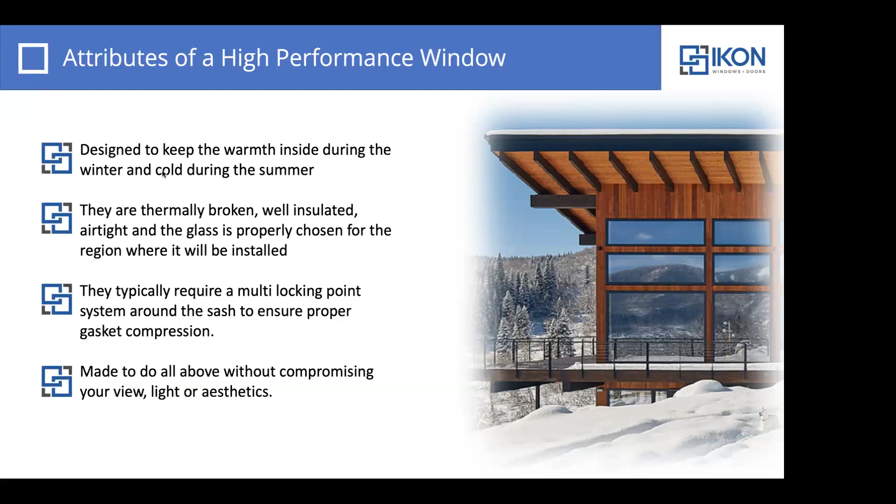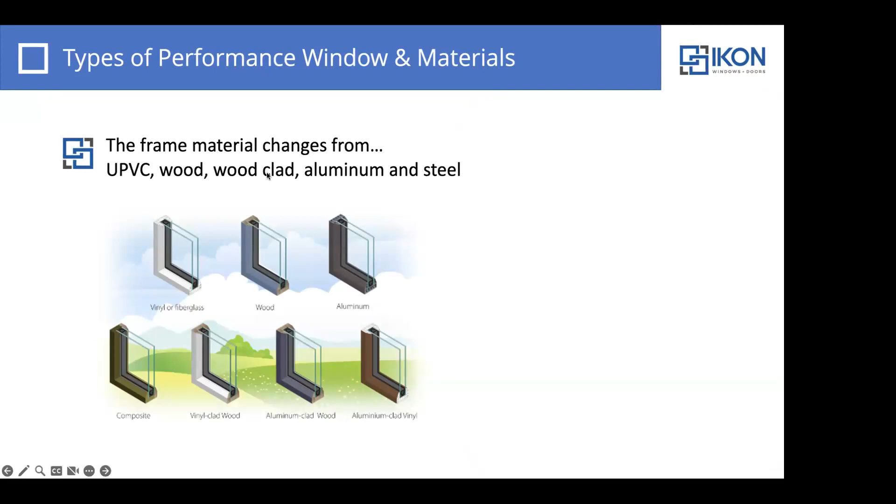So high performance windows do come in various materials. This would be your standard vinyl, fiberglass, wood, aluminum, composite, vinyl cladding, aluminum clad, and aluminum clad vinyl. Today we're going to be talking mainly about UPVC, wood clad aluminum, as well as steel. All of these have different attributes.

UPVC windows are typically our low maintenance building material. They're the best bang for your buck and will achieve pretty much the highest performance to price ratio. Aluminum is more aesthetic. It is an anti-corrosion resistant material that can also achieve very high performance values with the correct thermal breaks.

Wood is sustainable, renewable, and in general, it's a higher performance material in itself, just because of the way that wood is naturally insulative. And steel, of course, is mainly an aesthetic option, typically made from galvanized steel as well as stainless steel. Thermal breaks are used in steel windows to increase the thermal performance.

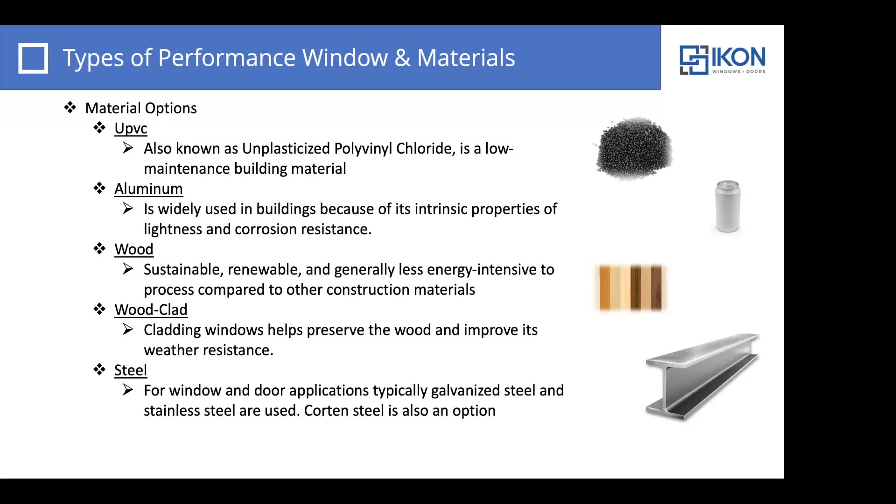So with UPVC windows, if we're looking for high performance UPVC windows of any kind, what we're going to be looking for is a multi-chamber design. So the increased number of chambers will increase the performance of a window. If you look to the left side, our IKON Optima Plus window, you'll see the number of chambers compared to, let's say, a typical Marvin window. So the increase in chambers will increase the performance of the window.

They can also be filled with different thermal solutions, such as foam or aerogel inserts, to further increase the performance of that frame. So with most windows, the frame is usually the weakest part. So as long as we can increase the performance of that frame, we'll be increasing the performance of the overall window.

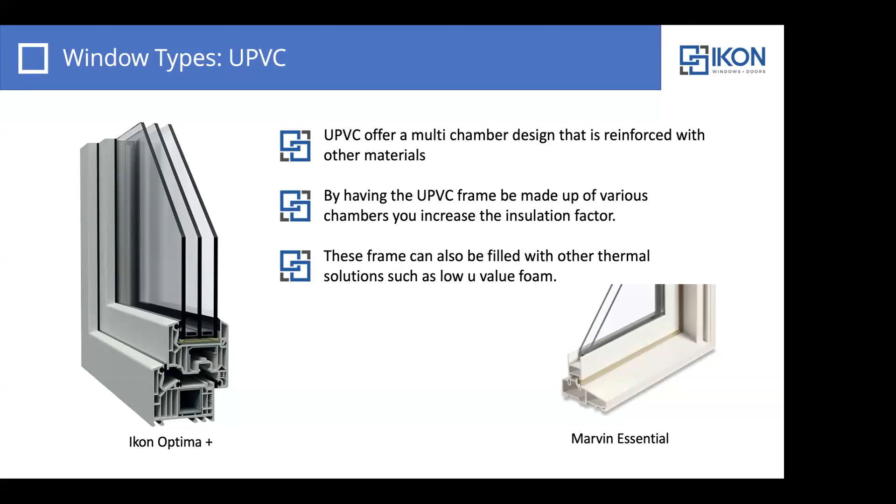Aluminum windows have a polyamide thermal break between the interior and exterior extrusions. This is usually made from a non-conductive piece, and the wider the thermal break, the higher performing the window will be. It also takes a note from our UPVC windows because they can also be made with various chambers that will also increase the performance of the window.

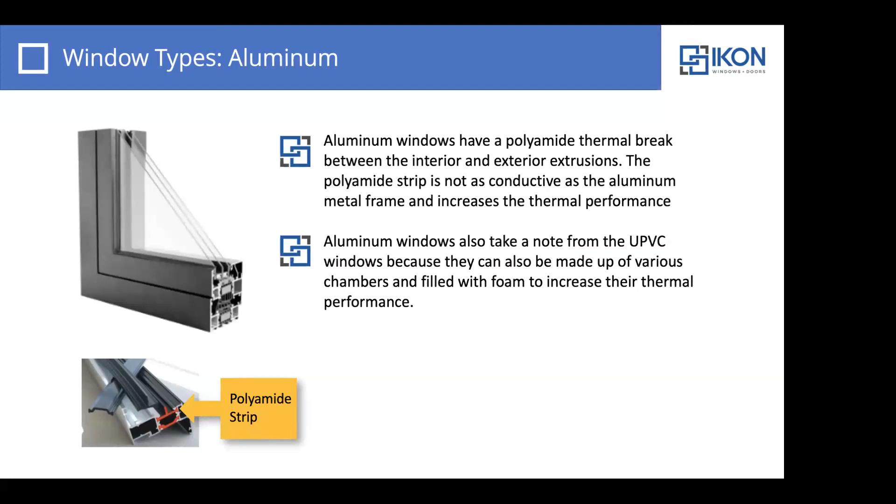So when looking at aluminum windows, what we're going to want to look at is the length of the thermal break that joins the interior and exterior, and of course any type of additional chambers in the thermal break or the aluminum extrusion will also increase the thermal performance of that frame.

Now, wood is naturally a good material for thermal insulation. We don't really need to do much in increasing the performance of wooden windows. If you're looking for the lowest possible U value, you're going to be looking at the width of the window frame. So typically the wider or deeper the wood is, the lower the U value will be. On cladded units, you can also look at insulated foam inserted between the cladded material and the wooden material to increase the thermal performance.

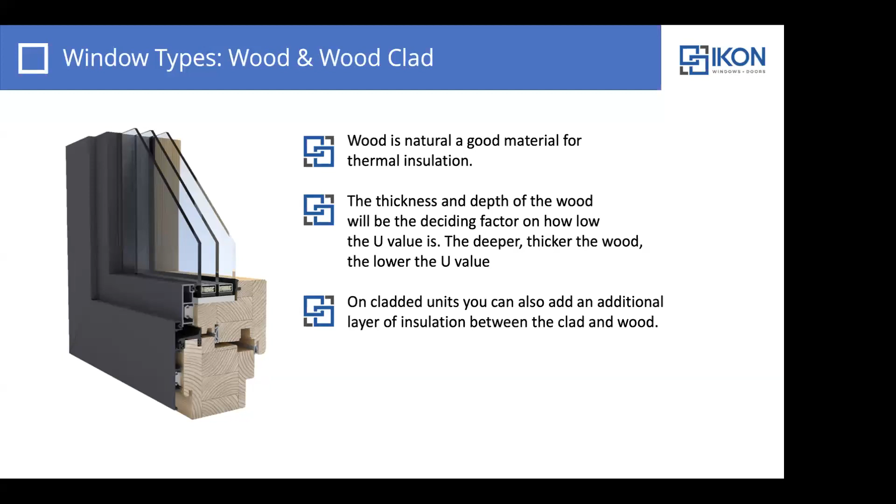Now, steel is mainly an aesthetic choice. So if we're looking for passive house U values, we're probably not going to achieve that with steel, but we can still get below Energy Star. We can still see U values in the 0.2 range, but this will solely depend on the type of thermal breaks that we use in steel. So the same concept applies as the aluminum windows. The wider the thermal break, the higher performing the frame will be.

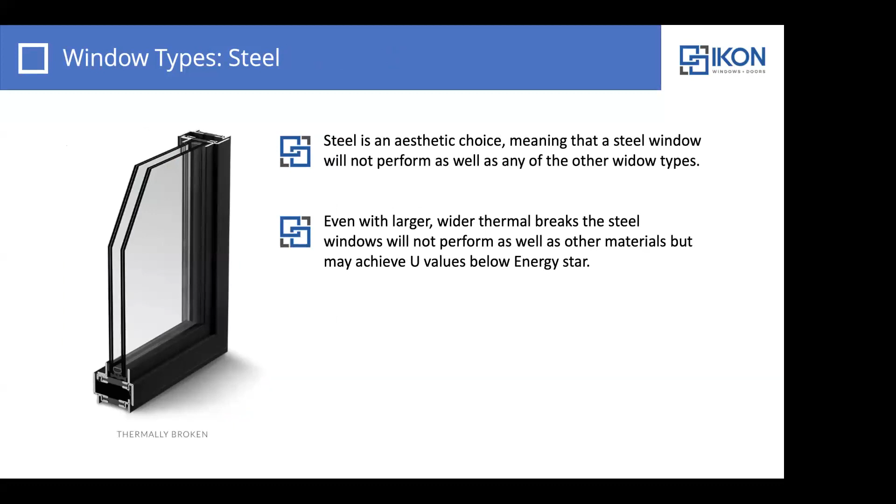So a little bit more about thermal breaks. Thermal breaks refer to the design feature that helps reduce the transfer of heat between the interior and exterior of a building through the window frames. So depending on the frame you choose, you will need to think about the best type of thermal break for your climate zone. If we're in a colder climate, we want to see those thermal breaks much wider, versus if you're in a warmer climate, you may not need to go crazy and your thermal break may not have to be as wide.

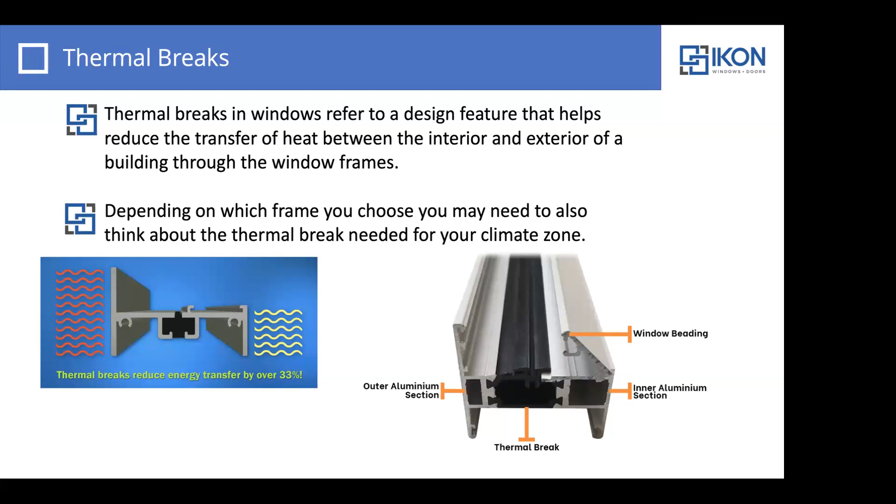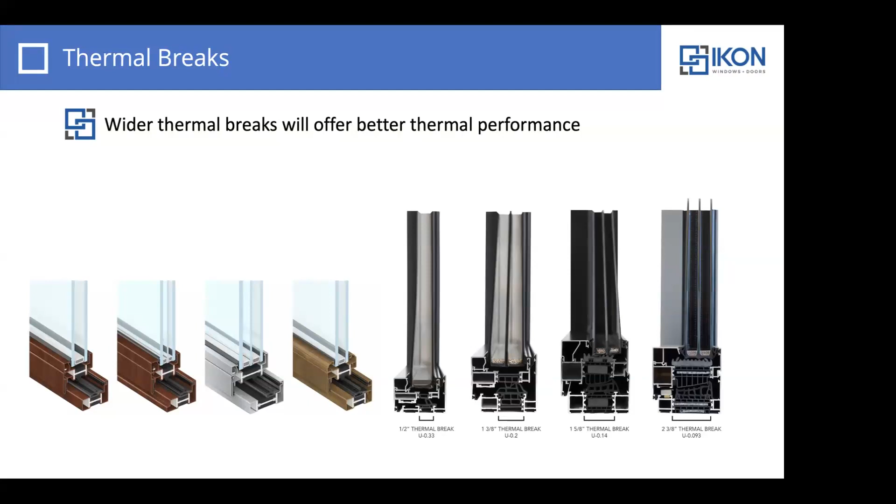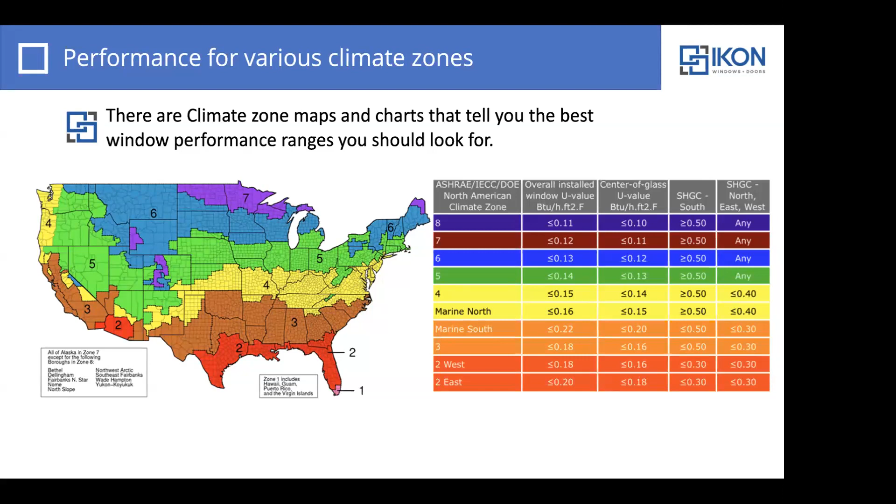Another key feature of high performance windows is a well insulated glass unit. So insulated glass units are typically double, triple, or quad pane glass units that we put inside the windows and the doors, of course. And typically there's a gas. What we look for is at least an argon gas to be filled in between each chamber. Argon is the most common and improves the U value because it does not conduct heat as well as air. We can also use krypton if needed. However, krypton is a little bit more expensive, but it does insulate better than argon.

What we've seen, it's sometimes better to go with a triple pane window and argon gas than, let's say, go with a double pane window and krypton. You'll get a better price for the triple pane, and the gas, well, in my opinion, the krypton gas is sometimes not worth the extra cost for the performance gain that you will have.

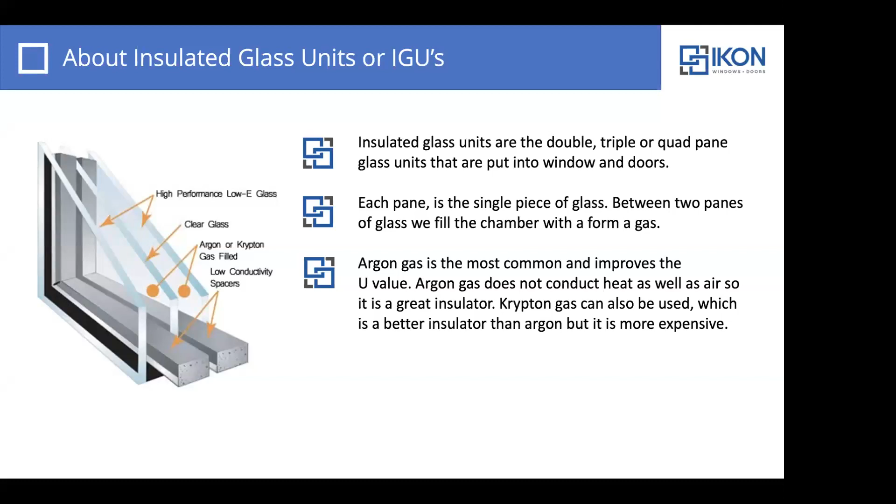Around the IGU, there's a spacer bar. High performance windows, high performance IGUs will use a warm spacer versus a traditional spacer. Traditional spacers are typically made out of aluminum or steel and they're empty, whereas a warm spacer will be made of some type of composite plastic and usually filled with desiccant. So what this spacer bar does, it further reduces the heat transfer at the bond edge, which translates into energy savings and warmth of the overall window.

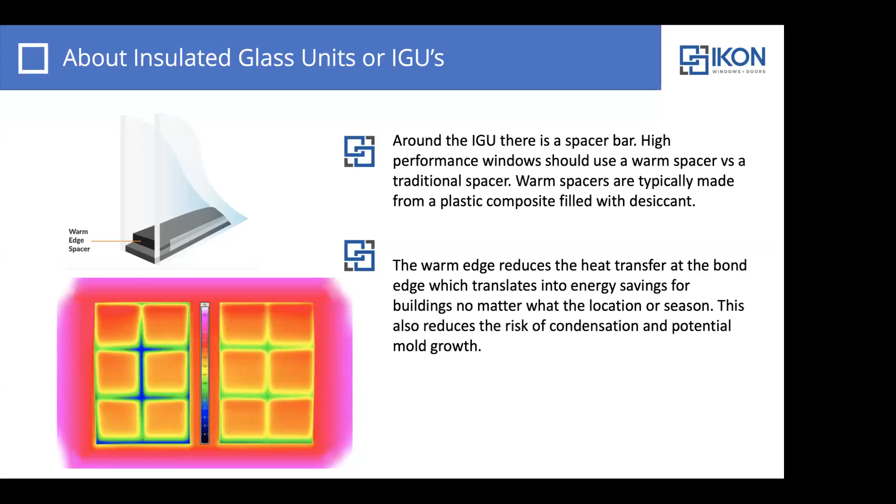If you look at the bottom left, you'll see one window with the blue crosses in the middle. That's what you would see with a cold spacer or a steel spacer, versus to your right where you do see a warmer spacer. You don't have as much heat going through that portion of the glass. With aluminum and steel spacers, due to the metal's high conductivity, heat can escape to the outside more easily. So this just shows you what we'd be looking at with a traditional spacer versus a warm spacer. The warm spacers, thanks to the high performance, minimize the cold bridge between the inside and the outside.

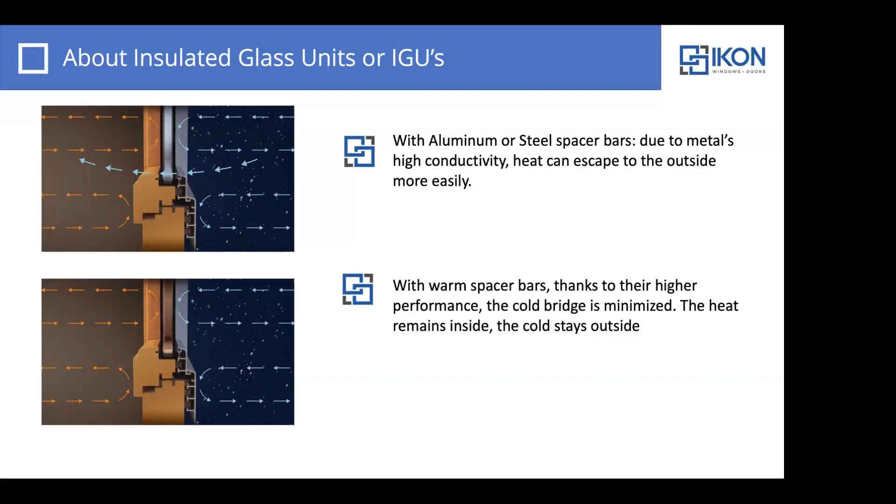So going back a little bit, I've already mentioned U value and SHGC just a little bit in the previous slides. But to determine how well our windows perform, we will be looking at the U value, the SHGC, and the air tightness. So the U value is the heat flow of the window, how much heat is actually escaping. It's the reciprocal of the R value. So typically, the lower the U value, the higher the window will perform. And in reverse, the higher the R value, the better the window will perform.

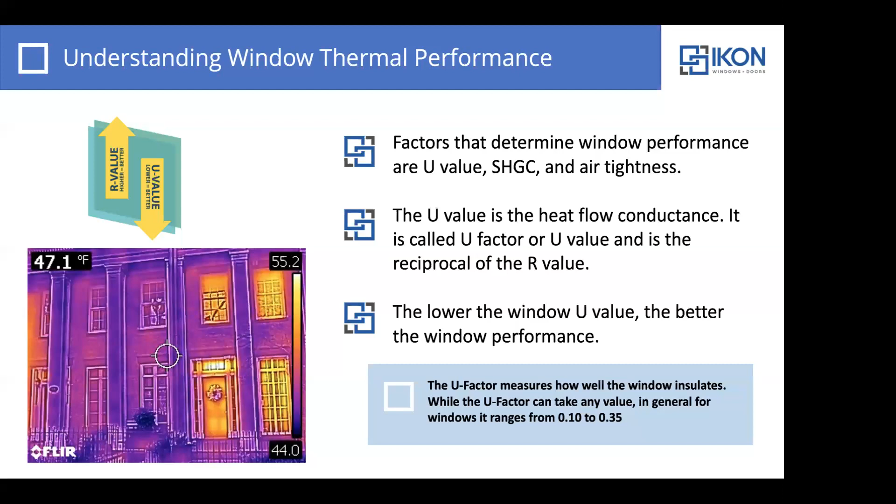Now, SHGC is how much solar radiation is getting transmitted through your windows and doors, pretty much through any glass portion of your house. The SHGC should be chosen depending on your climate zone. When we look at warmer climate zones, and if you're getting direct sun hitting your window, we should be looking for that lower SHGC value, keeping more of it out of the house, versus in colder climate zones where we have more room to play with the SHGC.

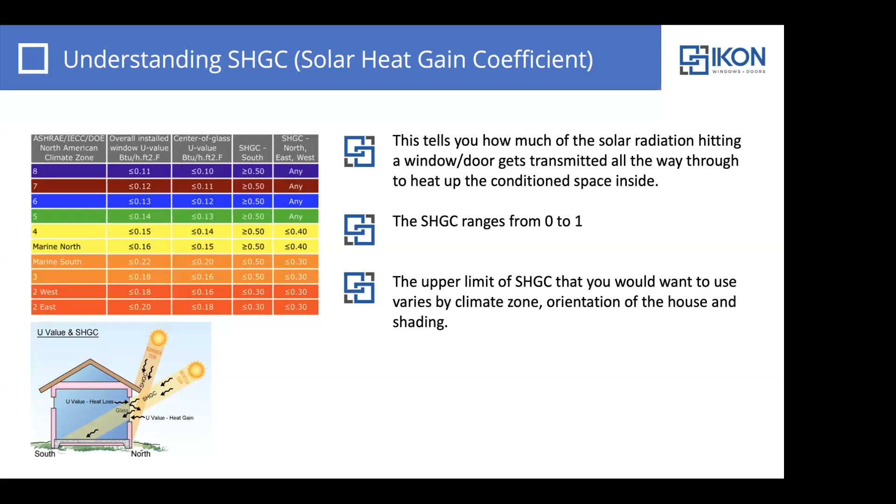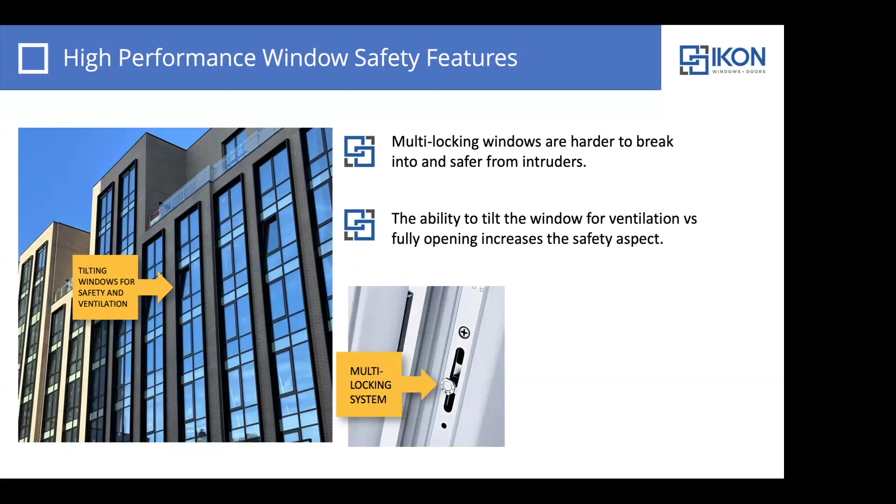Many high performance windows will use some type of multi-locking point system. In tilt and turn windows, we'll have a mushroom cap that goes all the way around the sash. They are usually harder to break into, so safer for you and your family. And they have the option of tilting, which is great for ventilation. The multi-locking points go all the way around the window. Depending on the size of the window, this can vary from 4 to 12 catches.

The added points do not only increase safety of the window, but they also increase the air tightness. When you do lock that sash into place, it compresses all the gaskets on your frame. The sash gets sucked into the frame. So depending if you have 2, 3, or 4 gaskets, you'll have a better compression of those gaskets by using some type of multi-locking point system.

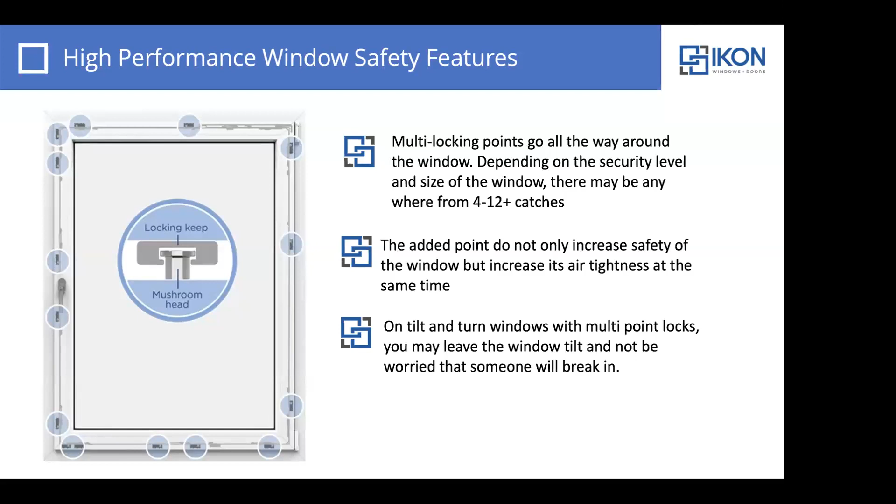Now, why is that important? It's important because most of the time gaps around the window are the major source of air leakage in a home. If the window is not airtight, then even having that low U value on the window, well, we throw it out the window, because the window can be warm, but if air is still getting in around the sash, then having a low U value pretty much doesn't do anything.

Having the airtight window is also a big factor in protecting the living space from pollution, dust, and odor. Living in a big city, we want to keep all of those things outside of our home instead of inside. So with an airtight window and a good air filtration system in your home, you can ensure that you're going to keep all the odor, pollutants, and dust out.

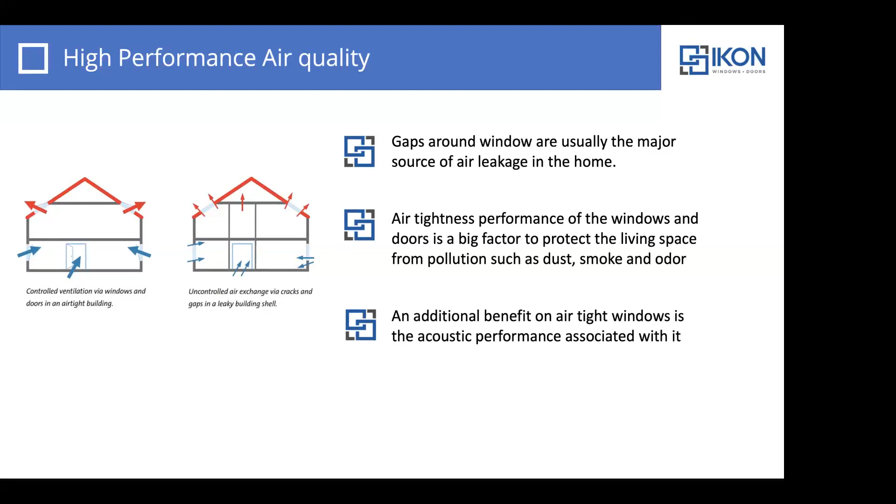High performance windows, depending on where you live, can also help with the acoustic performance. So when we're looking at triple pane windows, quad pane windows, these types of windows naturally have a higher OITC level. Depending on the window frame and the glass makeup, an OITC on a standard triple pane glass can exceed an OITC of 30. Now, if we start to laminate glass, we can go higher with the OITC, depending on where you live in the US.

I'm going to take my current location, New York City. We want to have all that outside sound stay outside. We want to create an acoustically healthy environment inside our homes. And the way we do that is, of course, the triple pane glass or increasing the panes to a laminate pane on the outside.

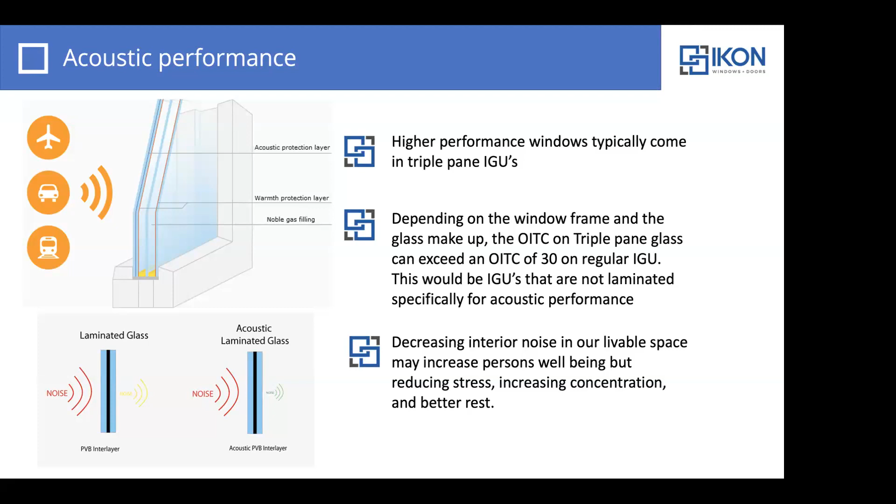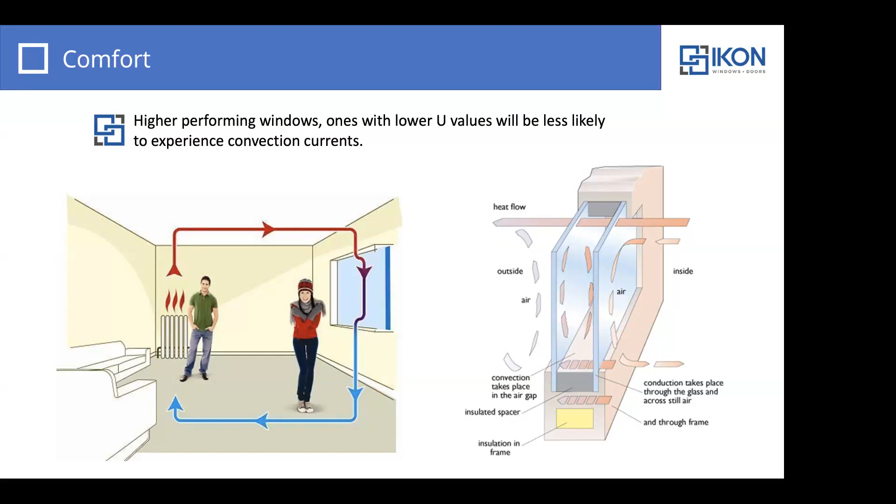Now, another health aspect or comfort aspect, one of the biggest benefits of high performance windows is, of course, the comfort. So with a warmer window, if we keep that heat in, you're less likely to experience convection currents. A colder window will typically cool down the air that we have inside our home. So you may feel like you have a draft, but what you're experiencing is a convection current. And by following the guidelines listed above, you'll experience better comfort from your windows.

So again, what we're looking for is appropriate U values for your climate zone. In colder climates, we're looking for lower U values, wider thermal breaks, triple pane glass. In warmer climates, we may be looking for lower SHGC. U value does still play a role in hotter climates because with heat on the outside coming in, you also want to have a relatively low U value. You don't have to go as crazy as in the northern climates; you have some more leeway in the south portion of the US.

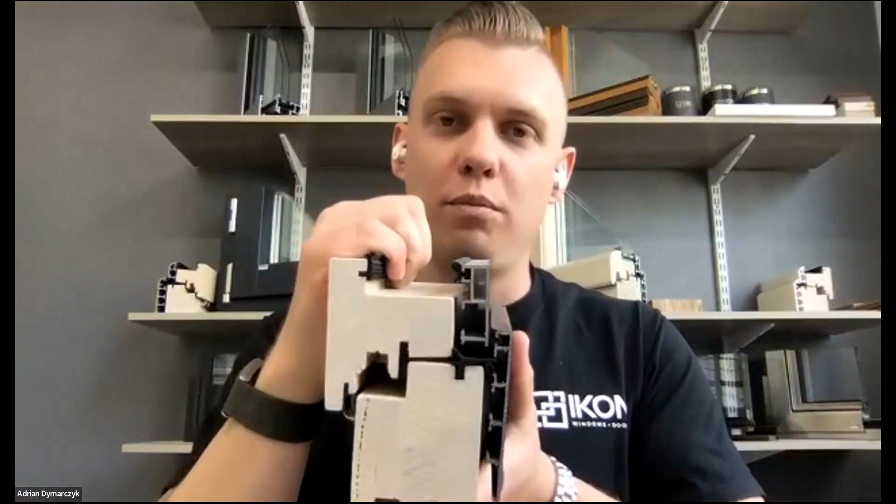If we look at our UPVC frame, we still have 1, 2, 3 gaskets. So we're retaining that air quality depending on your ERV or your air filtration system, but having it as airtight as possible. It won't really matter on the material as long as we have those gaskets. Now, if you're talking about VOC off-gassing, then yes, the UPVC is probably not as healthy as a wood frame or aluminum frame. So we would have to take that into consideration if that is your question.

Matt is asking about filler gas for high altitude climates. So it's not actually the gas that we change for high altitude. The last project in Steamboat Springs and Estes Park, the gas remains the same. What we do is change the way we build the IGUs. So there's 2 ways we can build the IGUs. One way is to have a balloon system.

Inside the IGU, we put a thin little piece of piping, you could say, with a balloon attached to the outside. And basically what that does is once we start transporting the windows, if that IGU starts expanding, that extra gas gets put into that balloon. So once we climatize in your area, we snip off the little pipe, and you have your IGU locked in with the appropriate amount of gas for your location.

The other thing that we use is somewhat like a bleeder valve. So it's the same thing, but without the balloon, the gas just escapes. It's a one directional valve. So enough gas will escape and then it pretty much shuts itself off. We do temper those units. That is very important, temper or laminate, because those units will expand. So tempered units can expand a lot more. They could actually bow out without breaking.

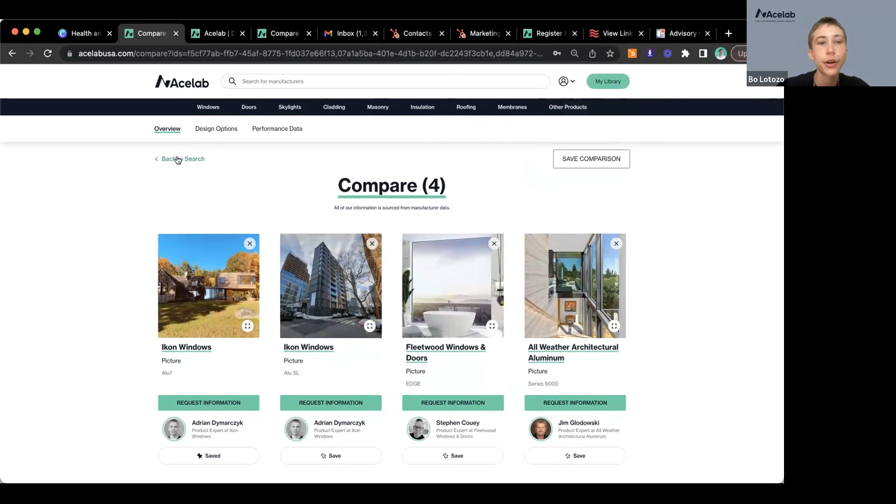All right. So that's kind of a quick overview of how our search tools work. And then I'll just quickly show you where you can find all of that information that I've just saved. Actually, I'll go back to my search real quick. So I'm going to go ahead and save this search. So if I get to the stage where I haven't quite selected a product, I can just save this search either to a project or without a project, depending on what type of research I'm doing. And then everything that I'm saving lives over here in my library.

So if I hop back to my dashboard, I can see that most recent search right here, pick up where I left off really easily. I can also see the products that I've saved. So I've got my IKON windows saved here, an overview of my projects, as well as any conversations. So over here, you can see I requested a price quote earlier. I can navigate back to this really easily, as well as see an overview of project details here.

And those are just tests, which is why Adrian isn't answering me.

And then to jump over to your project portal. So as I had mentioned, there's a few moments where you can upload a project if your research is project specific. So I can jump over here to my project portal, see an overview of the project that I have. Any products that I've saved will live right here. So that IKON Windows product that I just saved is available for me right here. And I can also use that comparison tool right from this page as well. So once you've saved your products, if you'd like to go back and continue comparing them to see an overview of the data, you can do that right from your product library.